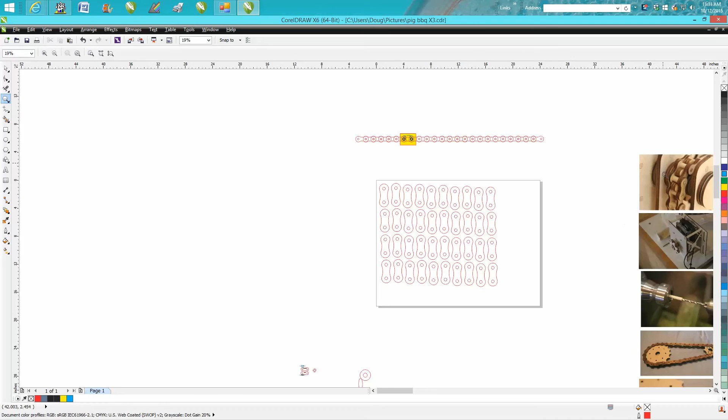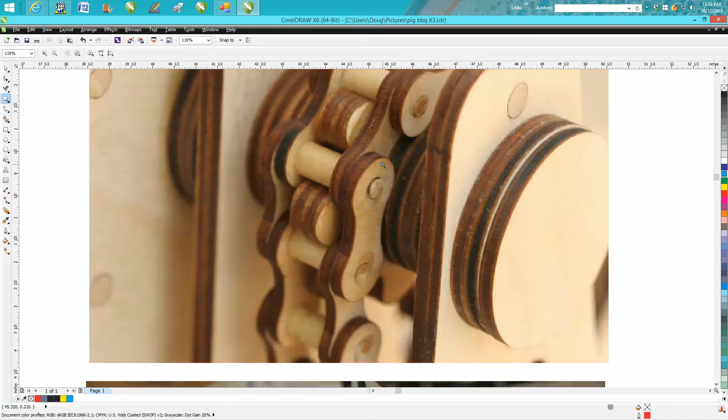But this is how you would. I'm a big believer in sanding. I see people post stuff where their items aren't sanded, the burn residue is still on it, which kind of irritates me. So your links need to be sanded. That's really hard to sand, that little bitty piece of wood, probably 3/4 of an inch long. Not only does it look better, I think it'll actually operate better because the sanded wood would have a freer flow of motion, not bind up. That resin, the burn residue, brings out the moisture and it burns it and turns it brown, and it's a little tacky, so if your pieces are tacky, they're going to hang up.

So what I suggest to do is cut them all out. I didn't do a very good job of lining these up, but you can get as close as you want. Don't get too close. Take some blue painter's tape, and tape before you take them out of the laser. Put a piece there, put a piece there. They don't have to 100% cover up everything.

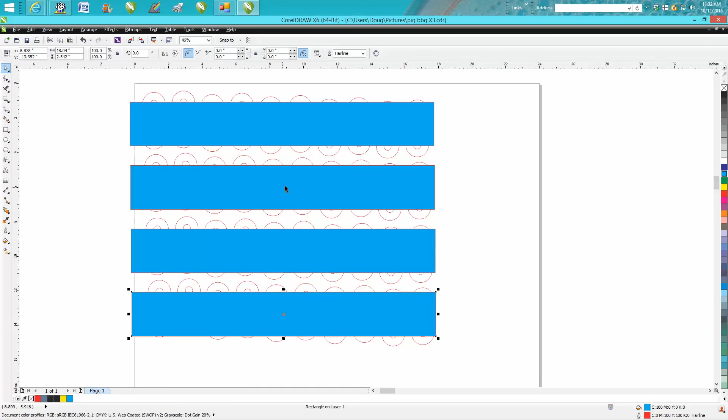But tape them before you take them out of the laser. One, it'll help you pick them all up and press the tape down firmly, turn it over. A few pieces might have fallen out, put them in place. Go get your random orbital sander. If you don't already have one, you need to get one, and sand it. The tape will help hold it in place because it's down in its own cavity, on the same plane as the wood.

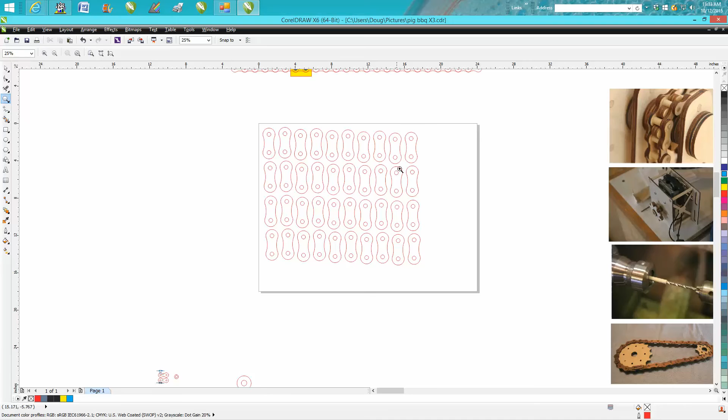Tape that all, sand that all really good. Blow off the dust with your air compressor, or if you don't have compressed air, just a light rag. And then tape this side, flip it over, untape the first side that you had taped, and sand that side. Then when the pieces come out, they're going to be sanded and ready to go.

Now, if you're planning on building your own sprocket, it's difficult. Let's get this smaller and move it down here. We don't need the rest of that.

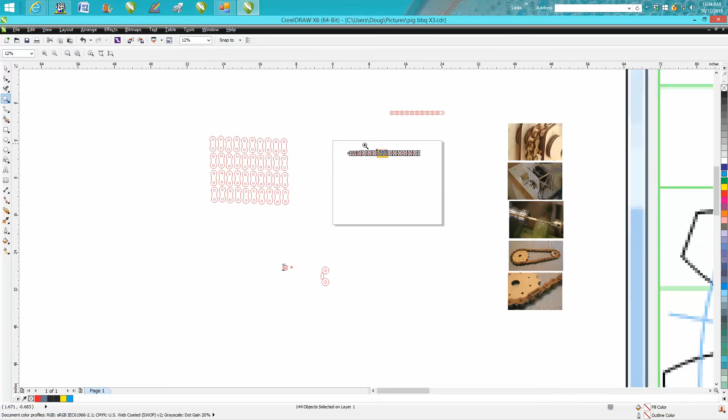On this particular chain, and this is where CorelDRAW can really help you, this is your parallel dimension tool. You just go from that edge to that edge, and it's 0.67 between those two rollers — this is where your sprocket needs to fit into. And you can play around, so if it's 0.67, I'd make it maybe 0.64.

I hadn't made my own sprocket in a long time, but you can see it fits down in there. Now it doesn't have to go too far, but you could draw this the same way. I'm not going to go into depth on this because I doubt too many people are going to draw their own sprocket after I tell you something else to do. I've actually got a video out there on how to build a sprocket, so search for that. But that's what you need to do.

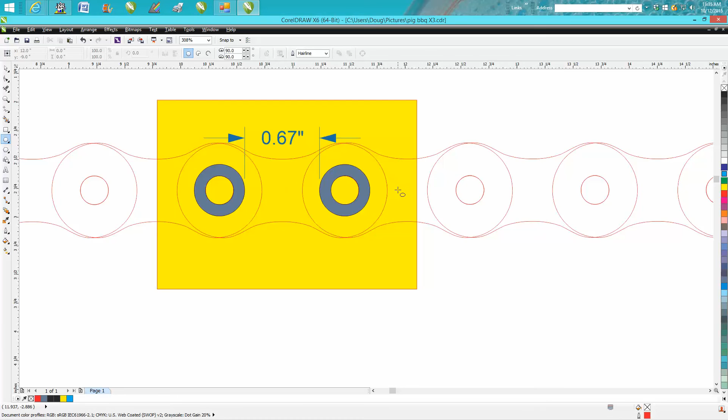Now, with that said, for $26 — and okay, it took me 2 days to draw the first sprocket to get it right. Not 2 days, I'm sorry, it took me 2 hours. It was like forever. And the bad thing about it, let's say I had 12 teeth on it, and it fit perfectly, it worked. I cut it out and it worked. I found this late one night on the internet.

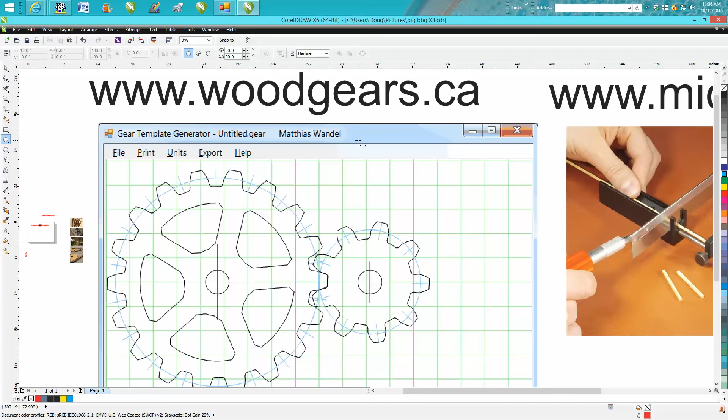www.woodgears.ca, and Matthias sells this gear generator for $26. It's just a program, he emails it to you. And that's all I'm going to say about the man — he's a wood genius. I've heard a couple people say, well, it's just numbers. Well, he's the only one I've ever seen do it.

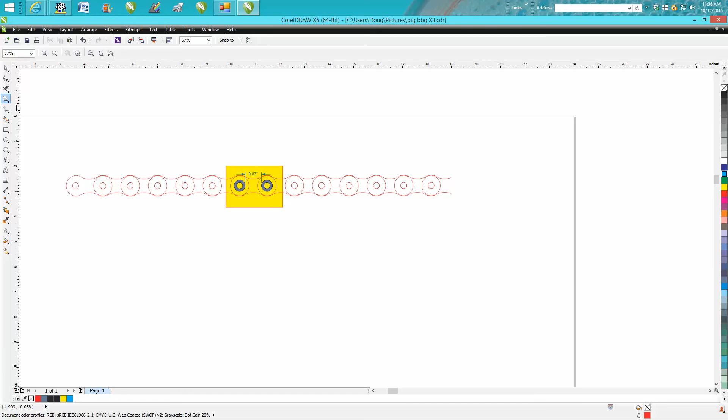So then all you have to tell the gear generator is the size of your roller, and it's actually going to ask for the space between the pins, which can be done real easy on your first drawing. There's your center.

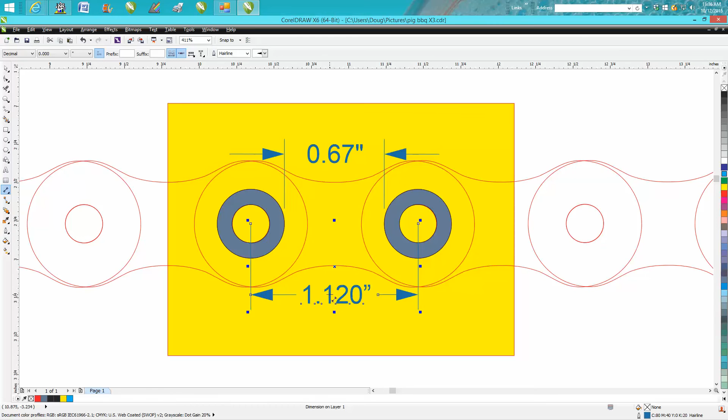There's your center, about 1 1/8 inches from center to center. That's all you have to tell the gear generator: how big this is, how wide that is, and then how many teeth you want.

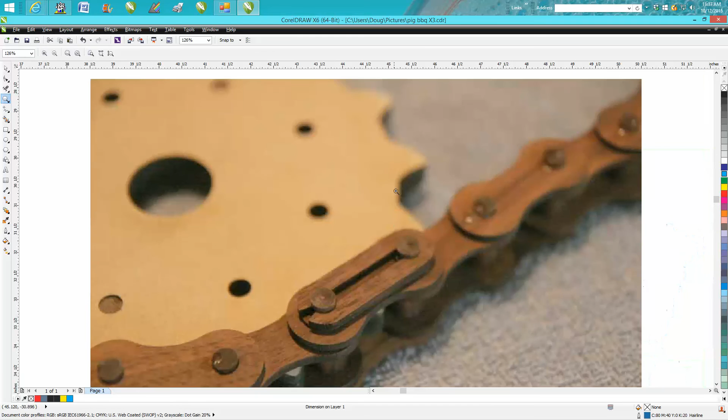In 2 seconds, I drew the first gear. This is actually the gear I drew by hand, and it took me 2 hours. But it works, it's perfect, it doesn't have a problem.

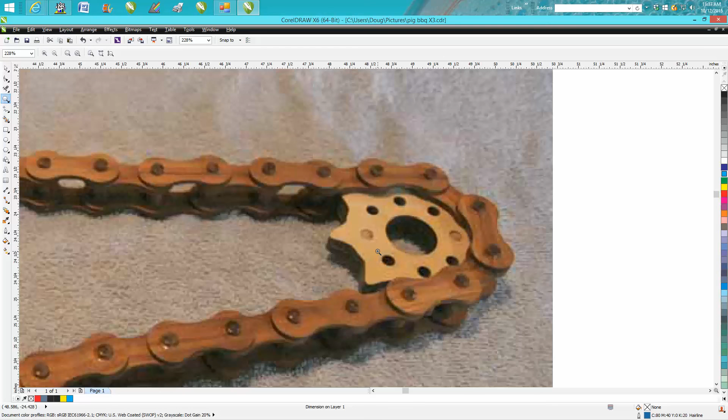Actually, I guess I made 2 of them, because those aren't the ones I used. Here's the one I used, its edges are rounded off, and what's so good is it took me 2 hours to draw that one.

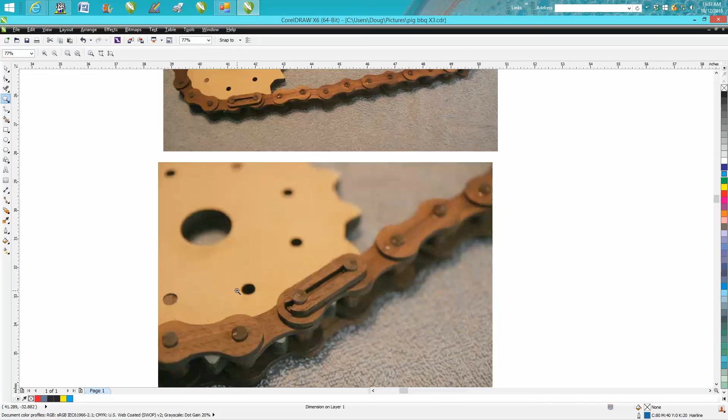I needed 12 teeth. If you want to reduce your gear down on the next sprocket to make that pulley turn faster, or if you want them equal, then you're done. You've got 2 sprockets. But as you can see here, I've got a big one and a little one.

That sprocket took me 2 hours. This sprocket would probably take me 2 hours too. With his software, in under 2 minutes you can draw that. Then in just under 30 seconds, you tell it you want to go from 12 teeth to 6 teeth or 8 teeth, whatever this is, and you're done. Your gears are drawn out.

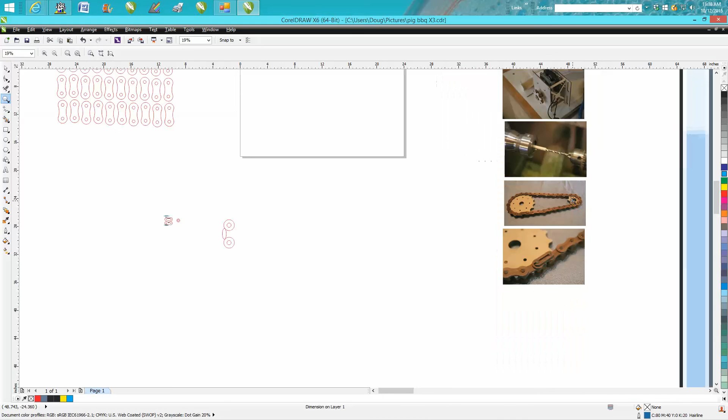It's incredible, it's a lot of fun to play with. So go to his website, there's actually a test version you can still play around with, I think.

It has a wobble effect, so you wouldn't be able to print it out. But then all you do is export it. If you have problems with that, I haven't done it in a while, but you export it and bring it to Corel.

One word of insight: when you're ready to export it, it's got all these graphics in it, the center finder and the pitch finder. Take all that away, take away the other gear, and just save one gear at a time, because it won't come up right in Corel Draw when you do it.

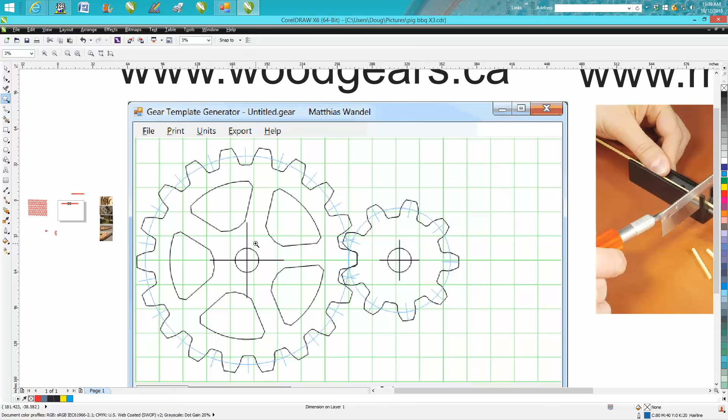Once you're in Corel Draw and you've got this gear, you can do anything you want to it after that. You know, like I drew...

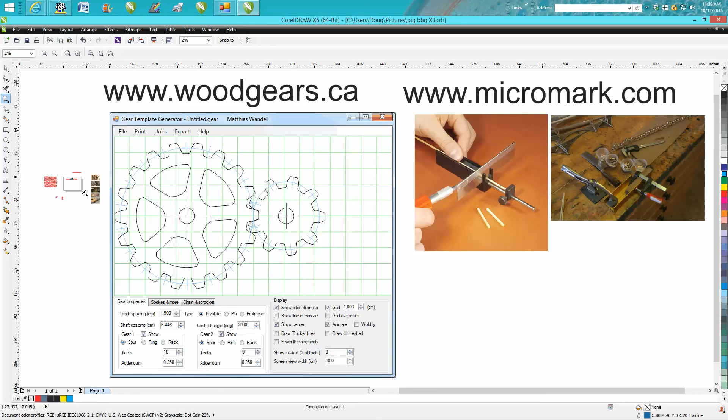Let's see here, sorry about that. I put little holes. I could have put anything, make it look like a sprocket, kind of like this.

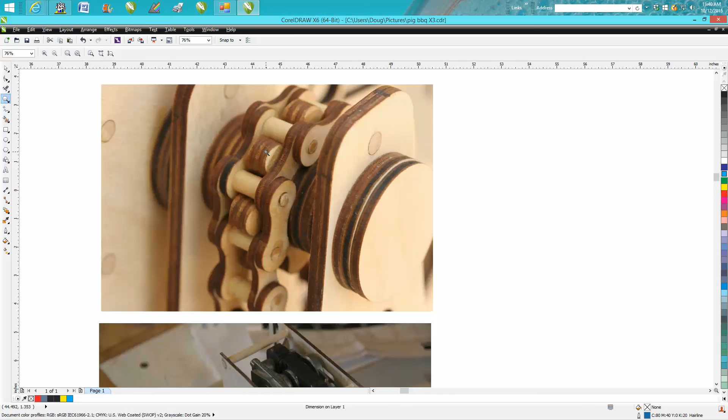Now, this is MDF. The other gears are plywood, 3 layers of plywood, 3 different gears glued together. There's no way to glue those 3 1/8-inch plywoods together.

There's no way to do it, with the exception of, and I've mentioned this in a couple other videos, indexing dowels. Same thing: go back, get you a dowel, measure a hole, do a test. This has 2 indexing dowels.

I put 8 holes to kind of make it look like a deal, but when you're gluing, like on this MDF, it only took 2 layers. When you make that dowel hole slightly, almost too snug, glue all your pieces, put a little glue in that hole, and actually have to use a hammer to tap that into the hole, it puts it dead on.

With that said, draw it dead on using the center of the page. If you don't, your holes will be off. Especially when using 2 pieces, if you've got one upside down and the holes aren't equal, one face up and the other face down, the holes are going to be a little bit off. That won't happen if you draw your holes correctly, and there's plenty of videos out there to show you how to do that.

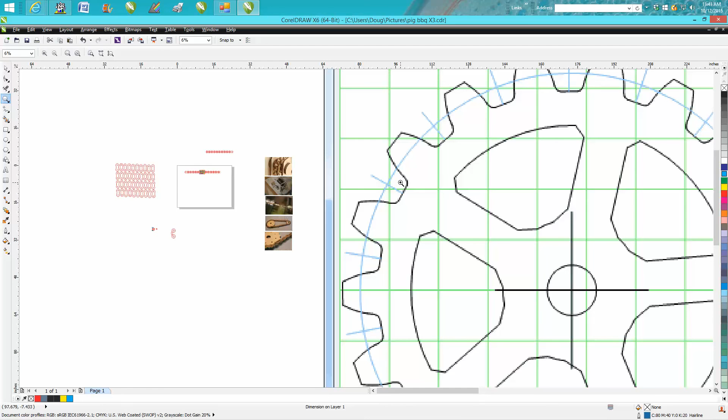So do an indexing. All you need to know is those two measurements and then how many layers of plywood or whatever you need to fill up your chain, and that depends on how many times you want to build this roller, how wide you want it.

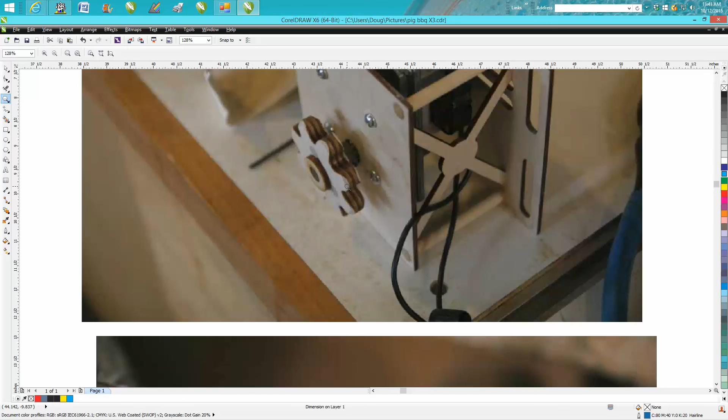Now you can see in this one and this one, I sanded off the edges, the tips, so it'd give a little bit of give and wouldn't be a rigid, hard cut if it ever hit anything. This one, I don't think I did it on. Yeah, I did a little bit.

But I have a lathe, and I'm able to put them on there, spin it off, and sand them off.